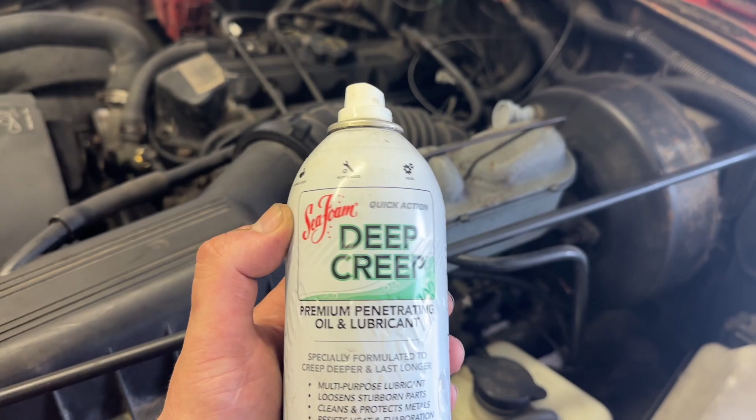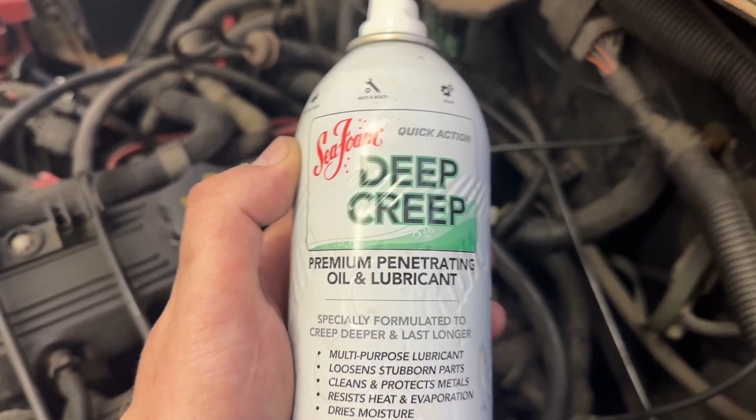All right, this thing's tough to get at. Highly encourage you to get some Deep Creep Quick Action or PB Blaster, pick your brand. We're going all the way down inside here. It's a long reach, so you might as well use some things to help make it a little bit easier. I would even hit this the night before you try this job.

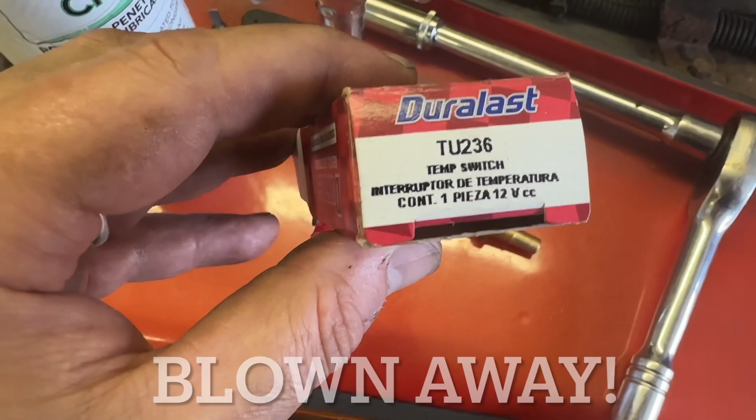I was absolutely blown away by the fact that AutoZone just down the road had one of these temperature switches, it's called a Temp switch, but it's basically a sending unit. They had one in stock.

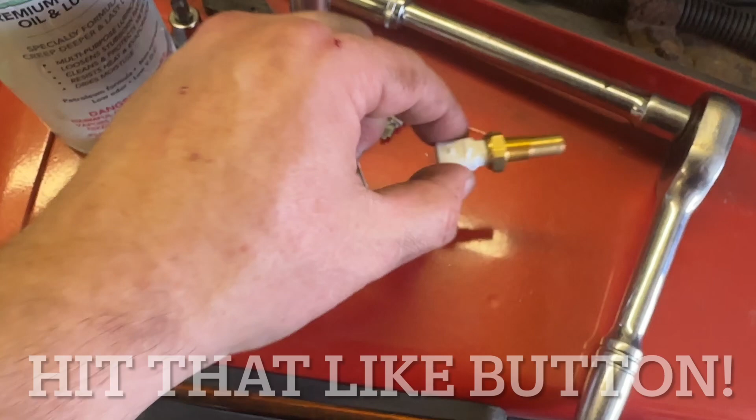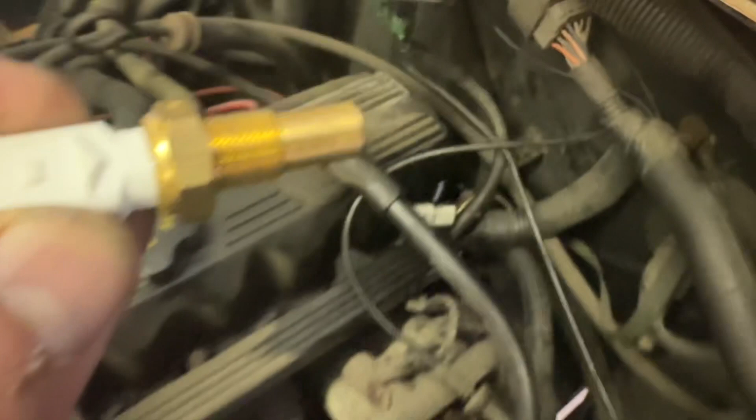Let's take a look at the piece. This is the connector, this is where we pulled the plug out in the previous video. And this is going to go down into the manifold, all the way down into there. I have no idea how the hell I'm going to show you this, but there it is right there. That's what we got to change.

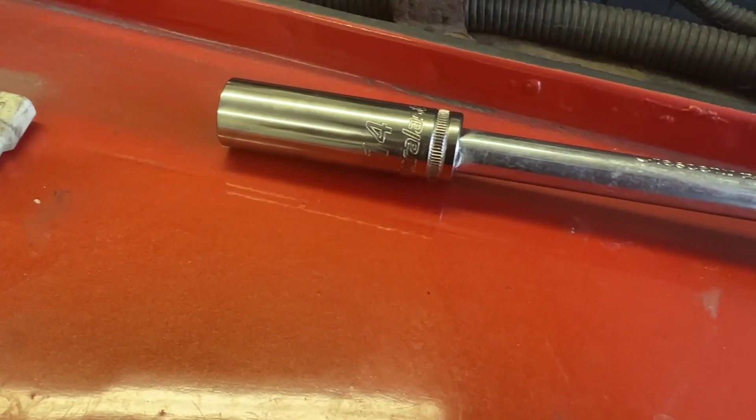I think the best way to do this would be a 14 millimeter, get a long extension on that ratchet. For good measure, one last time, kind of for good luck, I'm going to reach down in here and hit this again.

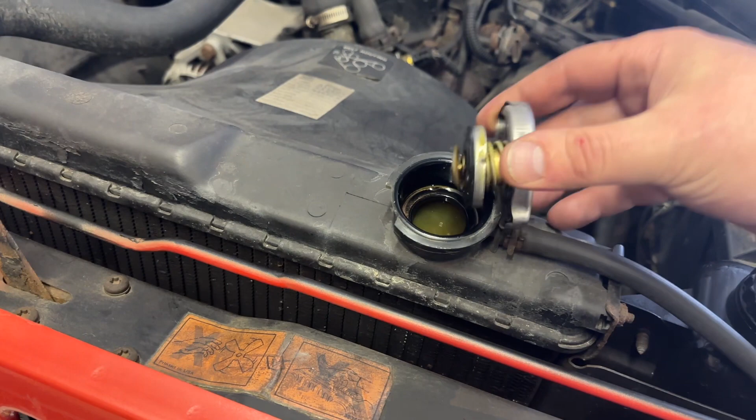Before I go ahead and pull that out, I think it's just a good idea to undo the radiator cap. I also have put some cardboard down to catch any antifreeze. Hopefully it's going to be minimal antifreeze that comes out of this.

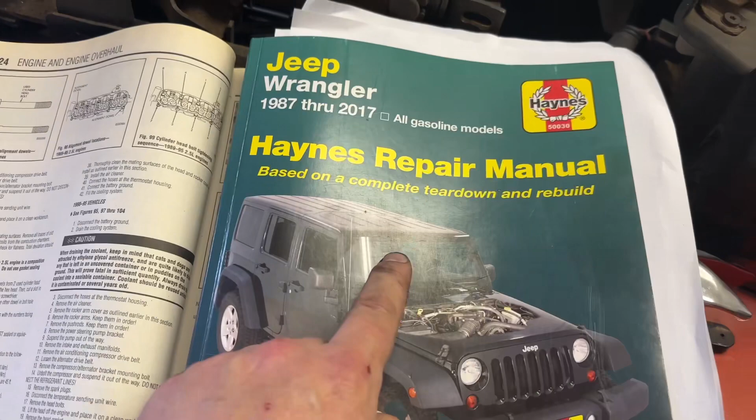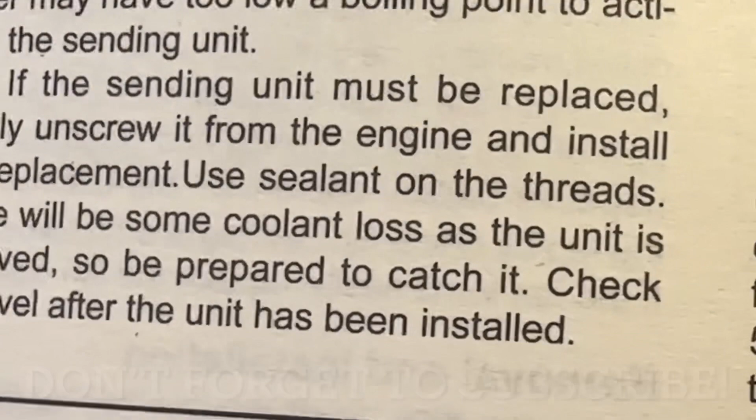I'm also going to consult my manual. Here's my manual, I've got another one too. This one is the only one that has any information on this, and this is all I see: if the sending unit must be replaced, simply unscrew it from the engine and install the replacement. Use sealant on the threads. There'll be some coolant loss as the unit is removed, so be prepared to catch it. Check the level after the unit has been installed.

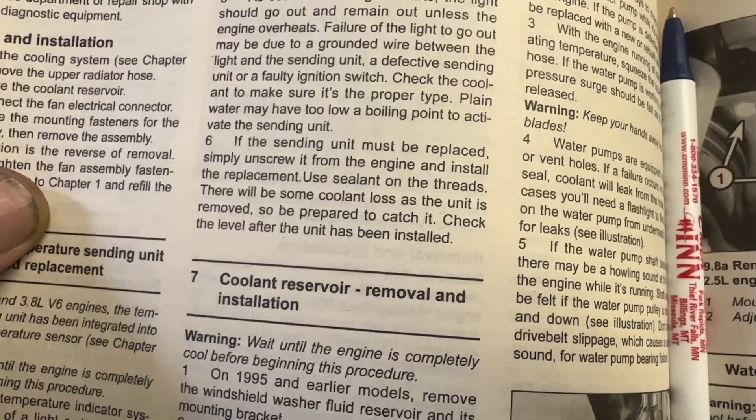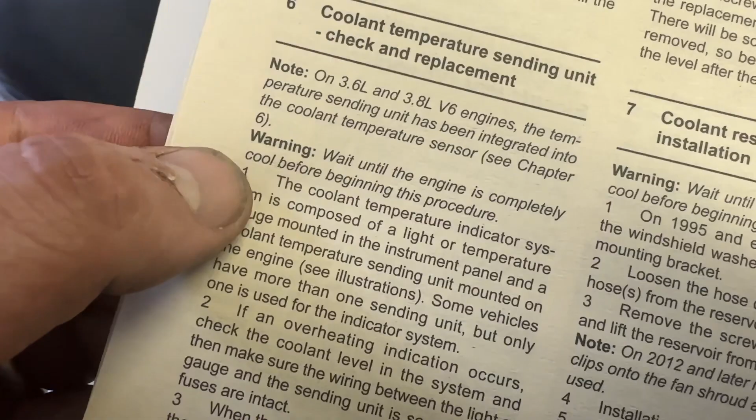That's going to mean I'm probably going to be burping the radiator a little bit as that goes. But I'm kind of wondering what kind of sealant I should be using. Couple other worthy notes - this should be done on a completely cool engine. That's another thing.

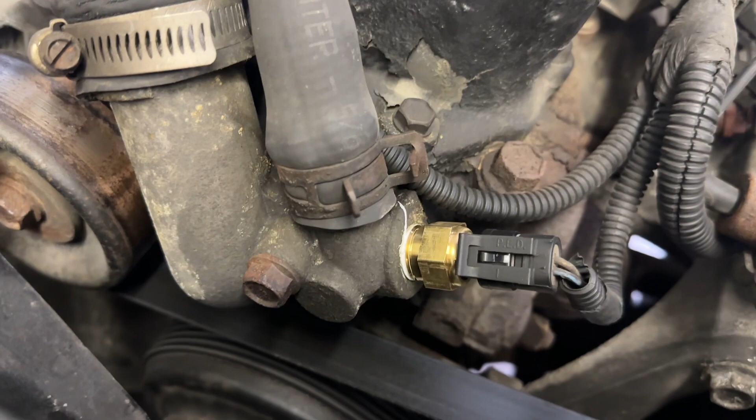As far as the sealant goes, Teflon tape was used on the installation of the new sensor. So I think I'm going to go with that because I'm not finding any other resources here that indicate otherwise. And there we go, just a little bit of Teflon tape on the upper threads.

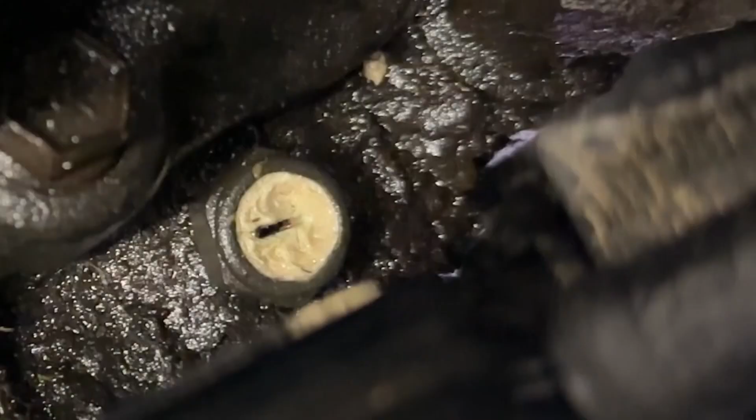So again, that temperature sending unit is right there. Note, it did break when I was pulling the switch out, so it was brittle. It's a 14 millimeter down there. I'm going to get that out with the extension on the ratchet. And check that - apparently this one is a 13 millimeter.

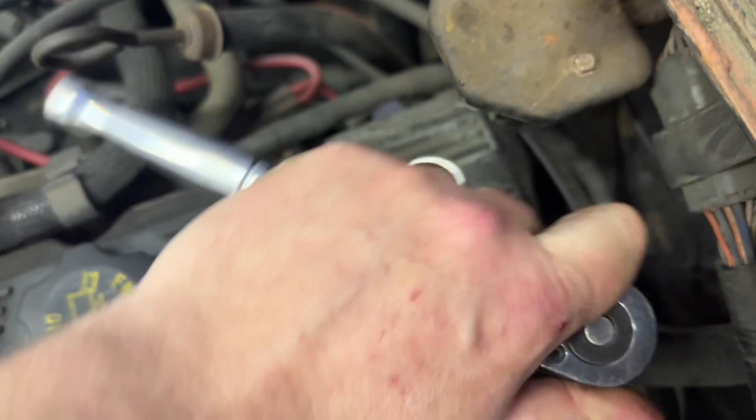I'm going to slowly back this thing out, just a little bit at a time. But yeah, it's a 13. Just going to take it really slow and steady on this. Pull this out, kind of watching to see how much coolant I'm going to lose. I got my part pretty close, so I can get it in there real quick once the time comes.

All right, I think we got it. Be able to reach down there and grab it. I can spin it with my hands, it's nice and loose.

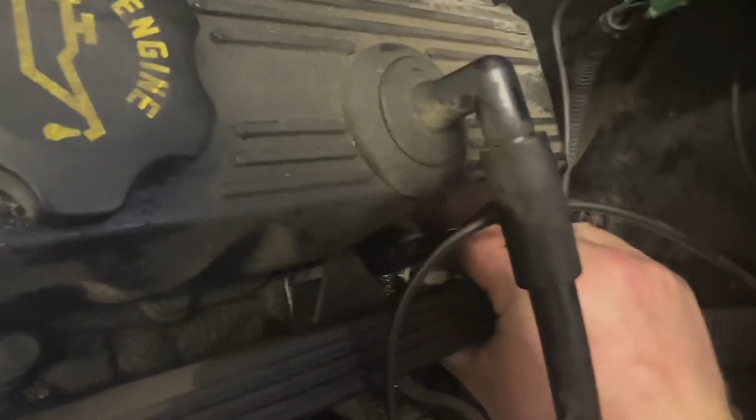Don't see any fluid yet, just a little bit of antifreeze bubbling out of there. Ooh, a lot. She's bleeding out pretty big. I'll be putting some antifreeze in this, we'll be refilling the antifreeze. That was a lot more. I'm really glad I got that, I did put a catch can underneath. Learning every day, I don't know if there's really anything I could do to prevent that.

But there we go, new sending unit is on the way in.

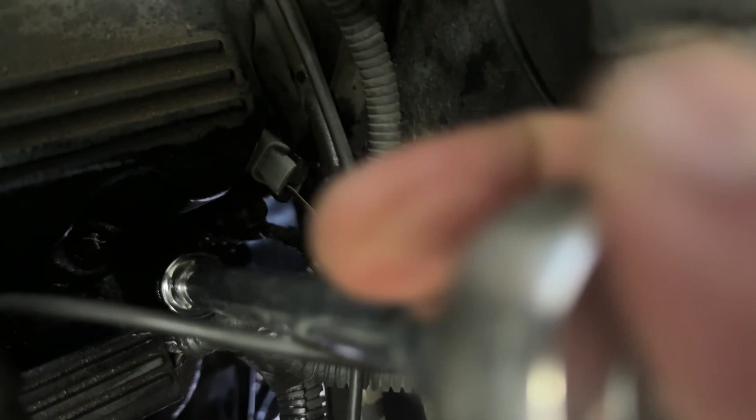All right, with that back in, I'm just going to carefully tighten this thing up without breaking off the connector. Good luck, slow and steady, make sure you're not cross-threading. And send her home, there we go. That thing is seated down and in position.

All that's left to do on this part is to grab our wire, make sure we are oriented the right way - it only goes one way - and plug that in. Hard to do while holding the camera. And there we go, all plugged in, back in place.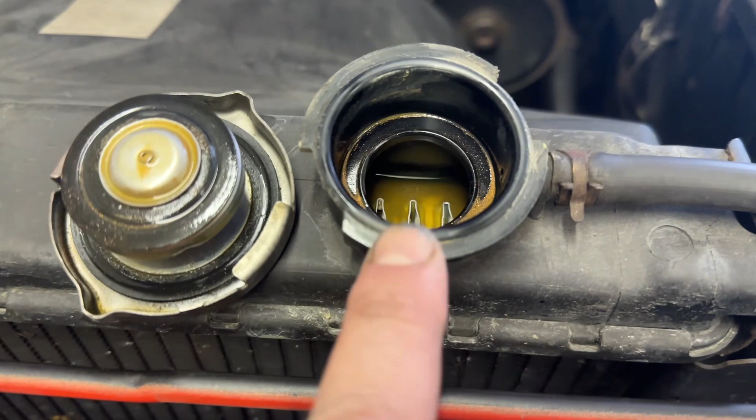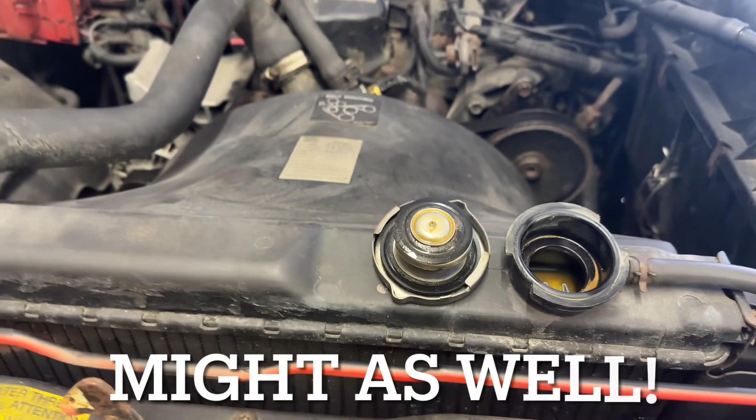We did lose quite a bit of fluid, so it's going to be fill and get all the air out of the system. There's a million videos on YouTube about doing that. We did lose quite a bit, so it might be time, actually - I might actually hold off because I need upper and lower radiator hoses anyway. So if I'm going to go through all that trouble, I might as well just flush the whole system.

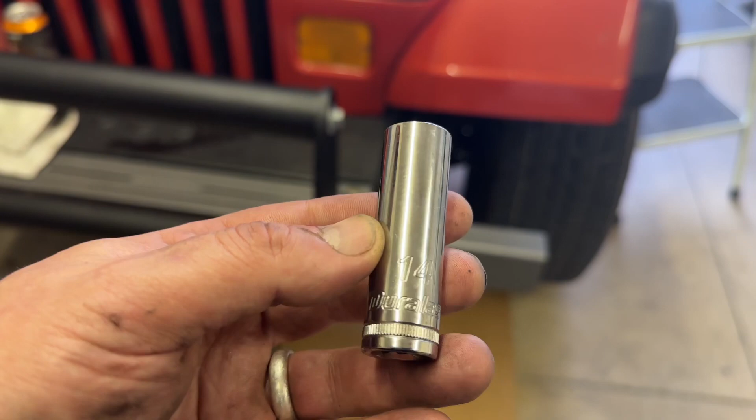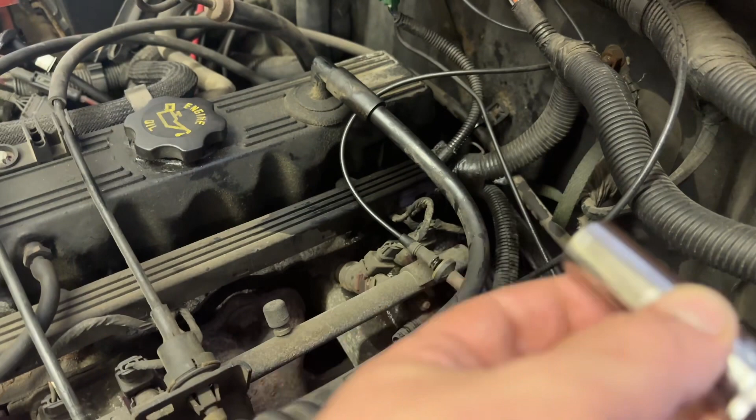But for now, at least I know that that sending unit has been replaced, and that's one less thing to worry about. I think the nice thing to have on this is definitely a deep socket. A little shorty ain't gonna work, and I can't imagine trying to use a wrench going back in there. That'd be absolutely miserable, so deep socket, you should be good to go.

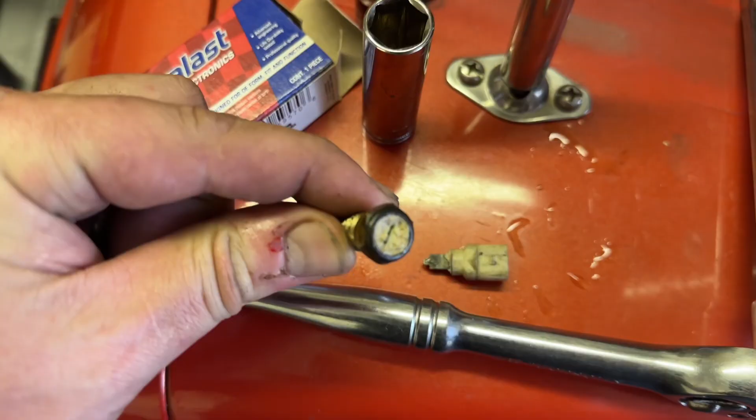Here's a look at the old part. You can see that just broke right off, so this was my problem right here. Now that we've replaced that, let me see if I can find the part number here - temp switch interrupter.

That's it. Fingers crossed that did the job, but I feel pretty confident about it based on the test we did in the previous video.

All right, I hope you find this useful. Just make sure you do your radiator top off right and get all the air out of the system.

And then I'll do probably a short or something once I get to that point, and let you know whether or not it worked or not. I'm pretty confident that it will.

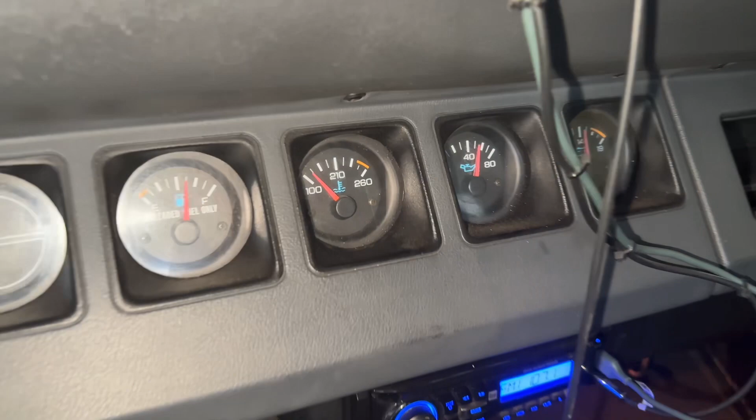And wouldn't you know it, been running for about 10-15 minutes and I've got myself a temperature gauge again. She's going up, gotta love it.